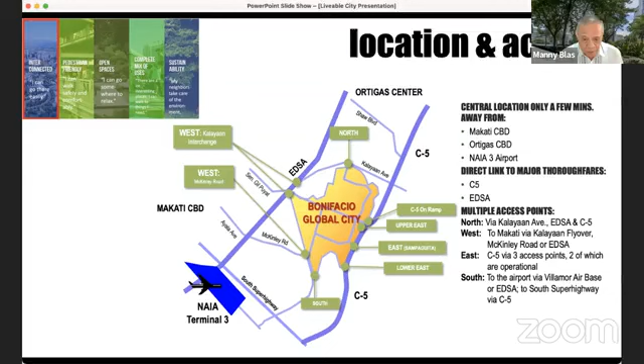This one is more, I think, to what the topic is all about, is how you make it pedestrian friendly.

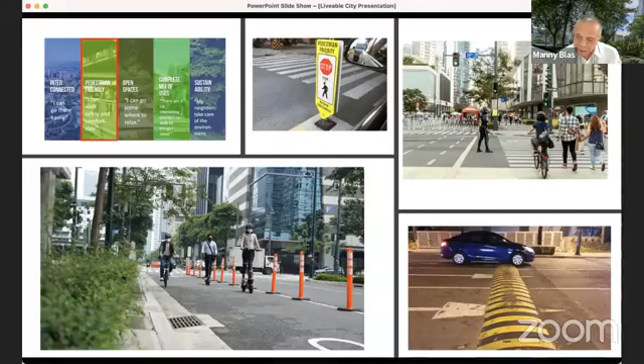The lower right picture shows one of the notorious bumps you'll see in BGC. If you hate this bump and think it's a stupid idea, I plead guilty, because we deliberately made it extra higher than usual, and we did get a lot of complaints. But this bump forces you to stop and really give way to pedestrians crossing. This one is right on the street that crosses to the Mind Museum, so you have a lot of children crossing here. Because of the height of that bump, you have to really stop, pause, and let the pedestrian pass. I bring this up because it was a difficult choice for us, between prioritizing the car or prioritizing pedestrians. We said, okay, let's get the flack, but let's prioritize the pedestrians.

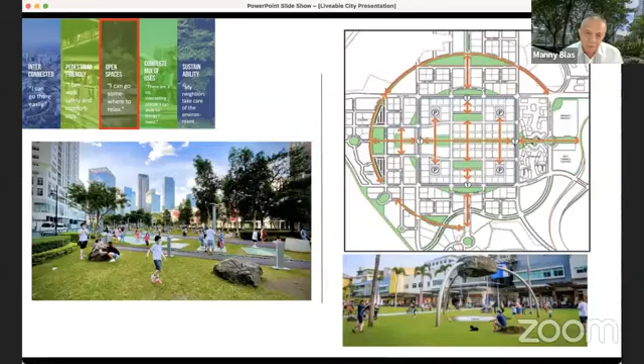Sustainability. There are measures you take to lower your carbon footprint. Even the use of pedestrian lanes and bike lanes lowers the carbon footprint, because it makes it more pleasant for people to walk rather than take a car, say from one part of BGC to Market! Market!.

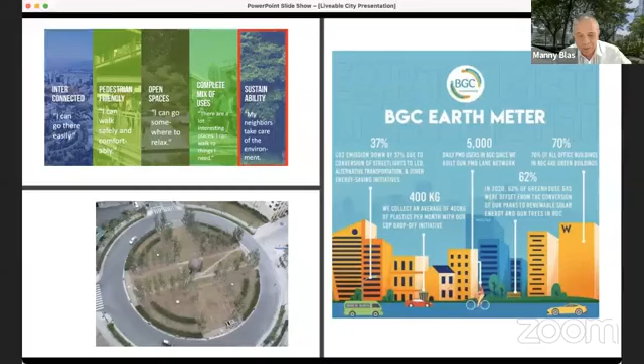I understand there are many mayors watching. This cost us 30 million pesos when it was originally built, and you'd say that's a lot of money. But if you imagine the damages floods cause, it pays back in a very short period of time. During Ondoy, Burgos Circle, the deepest part of BGC, was just about ankle high, while the rest of Manila was being flooded. This really helped us.

Let me now look at a place like Makati, which is fairly built, yet there are things you want to improve on. How do you manage it? This is where we apply the five principles.

In Makati, we wanted to make it pedestrian friendly, but sometime in the 1990s, when vehicular traffic became heavy, we built overpasses around 1995 to 1996. Not many people know there's an overpass connection from Glorietta all the way to Makati Medical Center, about 1.4 kilometers, connected along De La Rosa Street and along the buildings at the back. In some buildings, you can go directly inside from the overpass. It's weather protected, so whether raining or shining, you can go from Glorietta to Makati Medical Center.

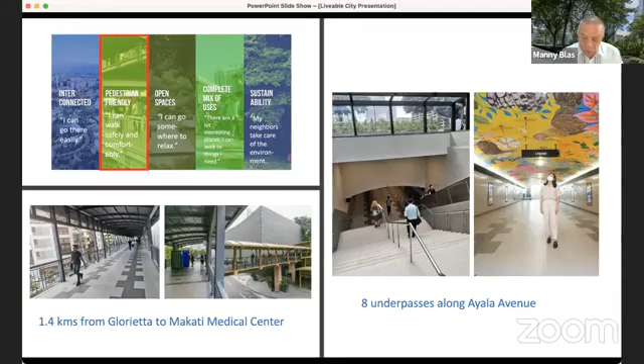Again, because of vehicular traffic, it was fairly complicated for people to cross the street. So we built underpasses so people can cross without interfering with traffic. There are eight underpasses along Ayala Avenue. These adjustments were not in the original plan, but had to be made in the middle of the plan to address issues happening at the time.

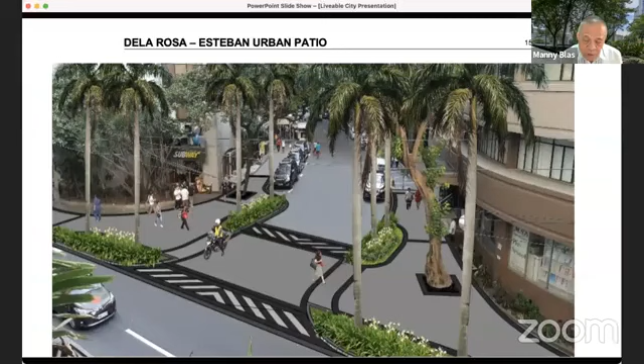Here's another thing I wanted to show briefly. You see how this intersection at De La Rosa and Esteban is fairly wide? What we did was close the intersection gap. I'll show you before and after. You bring the intersection closer together, which makes the pedestrian crossing shorter and gives more sidewalk space where people can gather. We put benches at these intersections to make it a gathering place, a smoking place, or a snack place for pedestrians—again, making it pedestrian friendly.

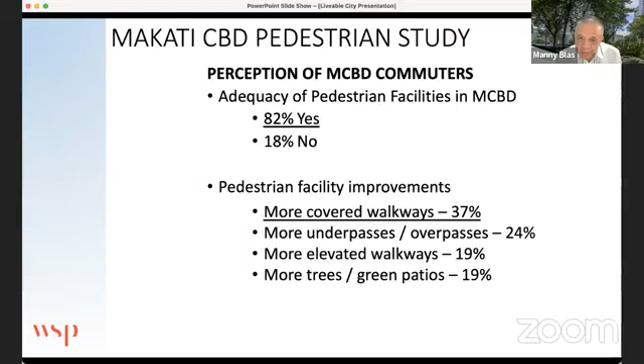We did a study. I've got maybe six more minutes, so let me wrap this up quickly. Covered walkways were our problem—37% said covered walkways. We had enough sidewalks, but not enough covered sidewalks. So we put in sidewalks that wrap around the tree so you don't have to cut it down. These really help pedestrians, especially during rainy season. Notice the arrow pointing to the sidewalk here—these are flat sidewalks, and that matters a lot. You might have a sidewalk that's uneven, but flat sidewalks make the walk very pleasant.

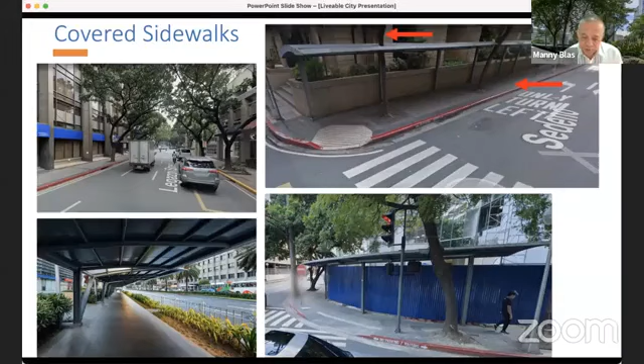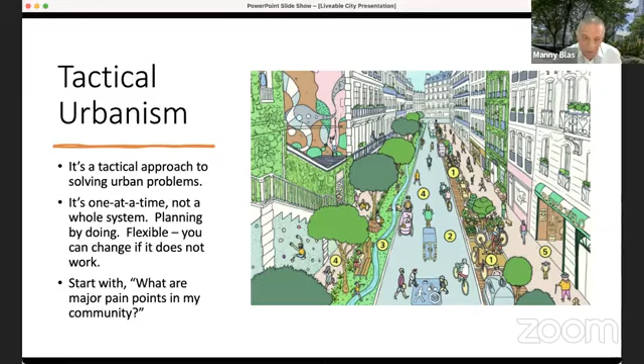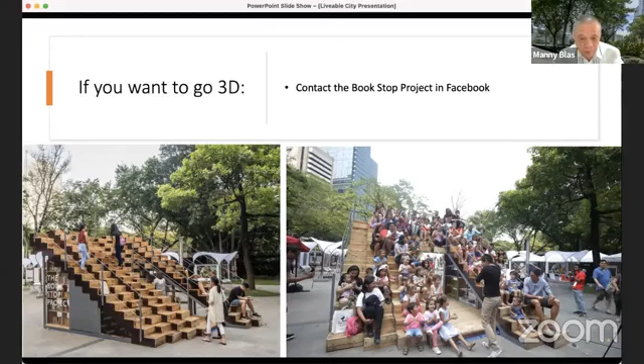If you want to go 3D, check out the Book Stop Project - contact them on Facebook, they install this for free. It's like steps, but underneath are books, and the concept is, if you want to borrow a book, just put another book. It's a perpetual exchange. Here's another look at it - at night it looks even better. Again, ideas that you can pick up.

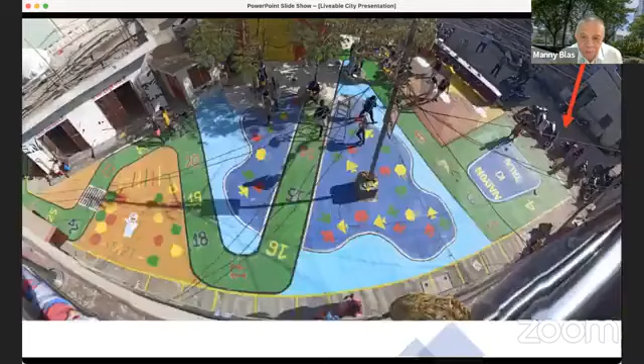Pain point: lack of places to gather. My suggestion is to look at the power of paint. When you look at the street and say, I'm going to paint this and mark it for common use, people respect that paint. Let me show you the next picture. This is a sidewalk where vehicles were probably parking. When they put this paint - can you see this arrow - suddenly the tricycles don't park on the sidewalks anymore. They stay just at the boundaries. This is the power of paint I'm referring to.

Here's another example. This used to be a parking lot. They put bollards on the side, and then they put paint, and now it became like a gathering place.

And I think you can have programs here. You know, if you want some programs or maybe rallies or whatever, you can use it in this space. And people just respect it once you paint it.

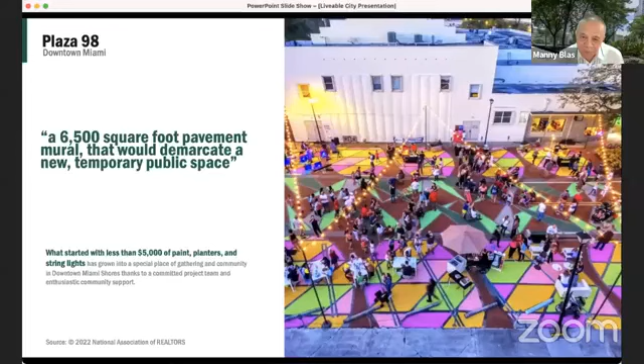Okay, here's another example. You know, kind of overdone, but you put lights, you put paint on the street. It's a way of reclaiming the street. As I said before, we think streets are only for cars, but streets can be for cars and people.

I've given this to some city mayors that I've dealt with, and they appreciate it very much. One is The Triumph of the City by Edward Glaeser, and then the other one is Tactical Urbanism, for those of you who want to learn more about it. Thank you very much, sorry to go over time there.

Thanks, Manny. And thanks for the really good live examples that you presented at BGC in Makati, and also for taking us through a tour of a nice place to live and to work, by the way. And I saw that you even use the corner of where I used to work in Makati. So it's good to see that. Yeah, great examples, really good examples. Thanks, we'll speak more to Manny later.

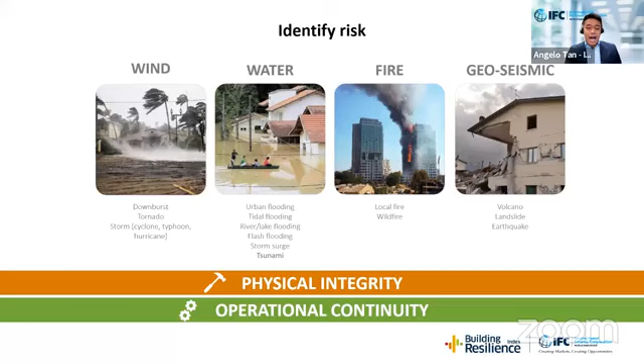We have wind, so that includes downbursts, tornadoes, storms, hurricanes, and typhoons. We're looking at water hazards, various types of flooding, storm surges, and tsunamis. We're looking at fire hazards, which include local fire and wildfire, and also geoseismic hazards, such as volcanic eruptions, landslides, and earthquakes. And we're not only looking at the physical integrity of the building, meaning the way that it was designed and constructed, but also the operational continuity of the buildings as well.

The vision is that each building in the Philippines will be rated from a scale of R to A+. Ultimately, the vision is to get all of the buildings in the Philippines to an A or an even A+ rating. Again, we hope that this can help make more informed decisions about real estate design, construction, and even investment, or even where the ordinary Filipino family will choose to buy their next home.

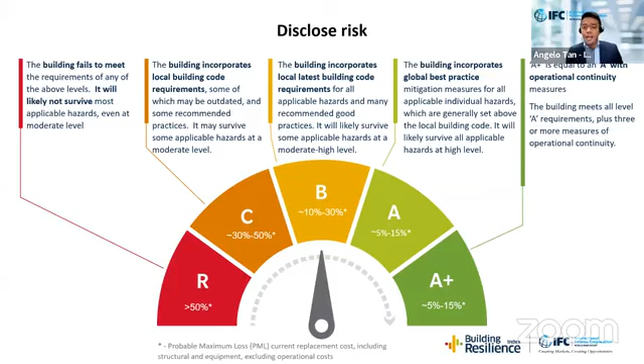We launched the Building Resilience Commitment Campaign in fourth quarter of 2021. It's sort of a resilience pledge where we received a pledge of more than 1.86 million square meters of space to be built or retrofitted to become more resilient to natural hazards.

They're EDGE Advanced certified, and they also have a very high level of resilience through their Conovate technology through Building Resilience Index. So they have certified most of their projects, and for Building Resilience Index, they're doing their assessment right now, and that will be third-party validated as well. Later on, maybe we can go through some of the measures that we implement to reach these levels of sustainability and resilience. So I'm going to stop there.

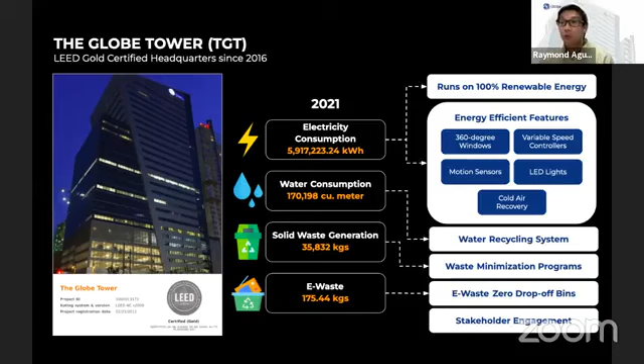We had to look at different ways of making sure we can implement best practices on sustainability. Number one is that at present, the Globe Tower now runs on 100% renewable energy, and I'll discuss how we did that. We have energy efficient features like 360-degree windows, variable speed controllers, motion sensors, LED lights, cold air recovery, however which way we can at least ensure that we are using energy more efficiently and we can minimize waste. We have a water recycling system. We do have waste minimization programs, e-waste, zero drop-off bins. And we do have stakeholder engagement to ensure the sustainability of such practices.

So here, showing the different energy efficient features and how we are running on 100% renewable energy. What we did was leverage the power purchase agreement with renewable energy suppliers since 2019.

So what we did was we leveraged the retail energy power contracts that we partner with in terms of our power supply and included sustainability in the vendor evaluation criteria. This would mean those we partner with to supply our building with power should have at least technical compliance on their power plant portfolio on renewable energy and how they can offer to supply the company, and the capability to issue internationally recognized verified emission reduction certification. This would mean that we will drive and promote that future partners and power plant generators will invest further in making sure they have more renewable energy supply and capacity, and hence scale up or have the capacity for renewable energy in the market grow.

For energy efficiency, we have a number of solutions, which I mentioned earlier. Cold air recovery, the use of cold restroom exhaust air to cool down, and variable speed controllers, and that is how we can have intelligent demand-driven motor controllers to power our cooling. As you know, a lot of the demand for electricity is related to cooling for any large building.

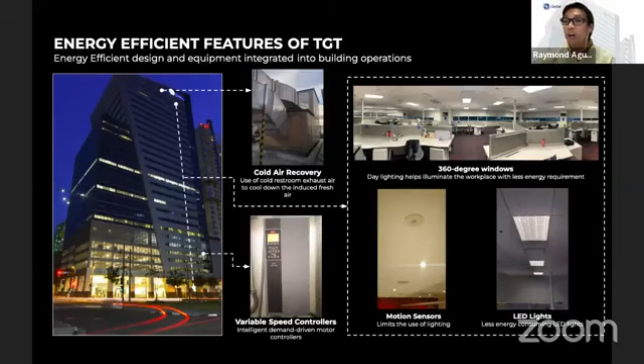We have a 360-degree window design, hence we harness daylight, helping illuminate the workplace. In this photo, you will see that although we do have some lighting fixtures on, there are some lighting fixtures that are shut down because we may not need all lights on for illumination of the open office workplace. We have motion sensors limiting the use of lighting in restrooms. And we have, of course, LED lights throughout the building to make sure that we are consuming less energy in our lighting needs. For rainwater collection and water recycling system, we actually have a gray water system.

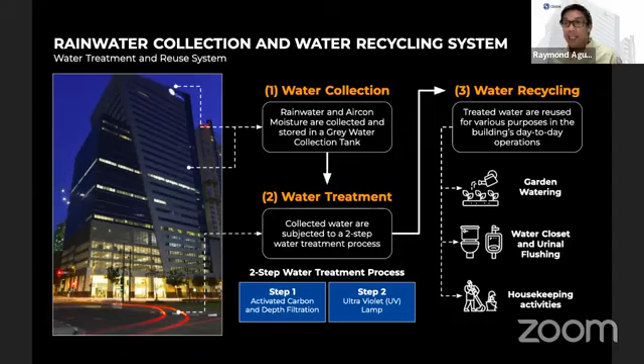It starts off the process with the water collection. Rainwater and aircon moisture are collected and stored in a gray water collection tank. This is treated through a 2-step water treatment process, activated carbon and depth filtration, and then UV lamp. And then we recycle this water, treated water that can be used in various building day-to-day. For example, garden watering, water closet and urinal flushing, housekeeping activities. Hence, we can reduce our demand for commercial water being supplied to our operations.

Apart from the features of the building, we have processes or activities within the operations of our HQ that relate specifically to waste management. We promote responsible waste management, and we have programs to divert waste from the landfill. One of these programs is e-waste recycling, where we deploy e-waste zero collection bins across our office floors to engage employees to be responsible in e-waste disposal and recycling.

Plastic waste management, we actually installed our own plastic shredder for processing of clean and dry plastics. And we have eco-friendly vending machines, cashless vending machines installed across office floors where you can use your own mug or your cup. We don't have to use the standard paper cup for your coffee. It's not a big scale implementation, but having this run in your operations in your building actually engages your employees to be more sustainable even in their day-to-day.

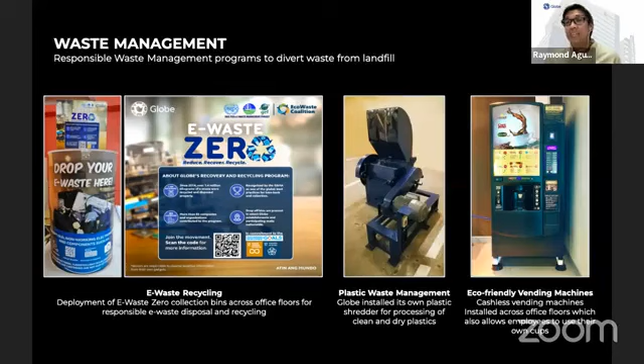For stakeholder management and how we go beyond, when I was first asked to talk about sustainability in operations, the best example would be our building, the Globe Tower in BGC. My first reaction was, but that's an old story, we did that back in 2011, 2012. Then I thought, isn't the mark of a true sustainable practice something you can talk about years after? And I realized almost 10 years after, we are still looking at how we can further improve the practices we have in our operations.

We maintain IMS certified operations: ISO 14001, ISO 45001, ISO 22301, for environment, occupational health and safety, and BCM respectively. In the past couple of years, just last year, we installed the Intelligent Work Environment Monitoring System, a little box you put on a workstation that shows regular and real-time work environment measurement, covering office temperature, humidity, air pressure, dust particles, carbon monoxide, carbon dioxide, lighting, illumination, sound level, and virus index.

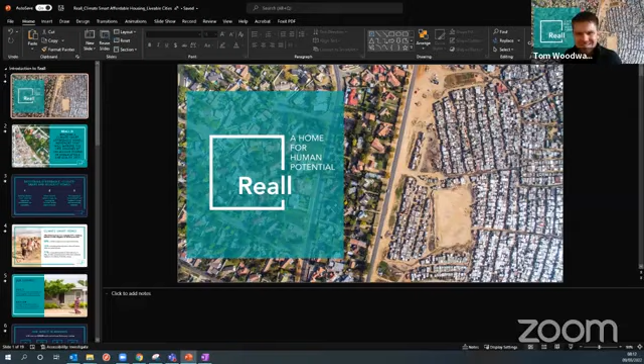Hi Tom, good afternoon. Good afternoon, and thank you very much for having me. So today, can you hear us well? Okay, there you go, we can see your slide now. Okay, go ahead. Brilliant, so thanks very much for having me, everyone, today.

It's been fascinating to hear all of the talks that have happened so far, and we're really looking forward to adding to that. Similarly to Angelo, we'll be talking through some of our building projects and how those relate to transforming a city, both in terms of being climate smart and being resilient.

To very briefly introduce Reall, we're an innovator and investor in affordable housing, and we aim for that housing to be climate smart to improve the life chances of 100 million people in urban Africa and Asia by 2030. We do so by investing in specific projects with our partners around the world, including in the Philippines.

Today I'm going to share with you some of the takeaways and lessons that we've learned from some of those projects. To do so, I have three key messages that I'll explain in detail through some case studies. The first, which I promise Angelo and I did not coordinate beforehand, is that building climate smart does not have to be complicated and it does not have to be expensive.

The second is that when we pursue system change, when we try and transition to a net zero economy, we must not let perfect be the enemy of good. And the third is that the concepts of zero carbon and resilient homes are not mutually exclusive. It's too common for us to see action in one area and perceived inaction in another, but actually we can achieve both with smart and innovative solutions.

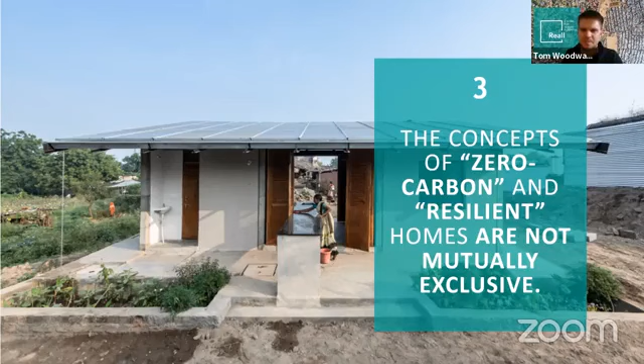This is another of our partners called Billion Bricks, who are currently pursuing projects in the Philippines and India. This is a pilot project in India itself. The model for this housing very innovatively combines solar utility scale and affordable housing, but in the inverse way to normal, where they've started with the solar and then developed the housing. As a result, they have these enormous solar roofs that ultimately reduce the cost of the home by about 20% through the energy savings.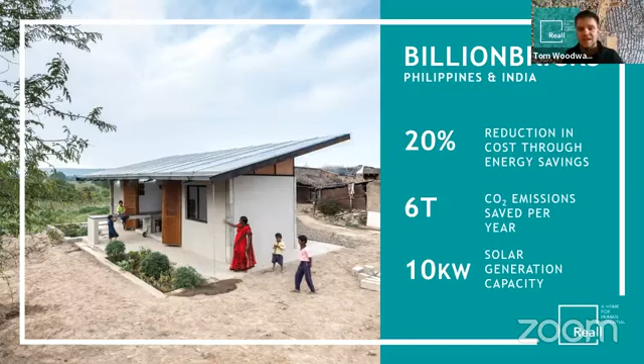They're saving about 6 tons of CO2 a year through that clean energy generated, which is around 10 kilowatts of solar generation capacity. In doing so, they are pioneering a model where for about a 15-hectare site, they're able to generate 10 megawatts of solar generation capacity while simultaneously building 1,000 net zero resilient homes.

The net zero element of this is fairly straightforward to understand through the clean energy, but the resilience, as with the other examples I've shown today, is being strengthened at the same time, because these homes are generating energy near to manufacturing plants and urban centres, providing job provision, reliable clean energy, and integrated water in areas where these sorts of solutions haven't existed before.

Again, this translates to city level, because when you have these kinds of solutions coming through, you start to look at how you develop a city differently, and you start to address some of those challenges, as we've seen with the BGC, where we need to find innovative ways of linking affordable housing in the right locations with solutions to the other challenges that stakeholders and cities face as a whole.

So those are my three key messages today. Building climate smart does not have to be complicated nor expensive. When pursuing system change, we must not let perfect be the enemy of good. And the concepts of zero carbon and resilient homes are not mutually exclusive.

I hope that this has helped inspire some solutions in the Philippines, where we're also active, and would welcome further conversations with anybody who would like to learn more. Thank you.

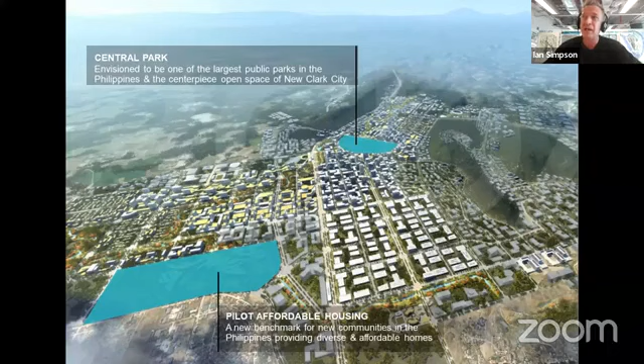I picked up on Manny's comments about the importance of water retention. When you think about a master plan, you have to be very focused on the big picture. I think one of the key mistakes which I've made, and we've all made, is that we look at the red line and what's inside it. Actually, a good sustainable master plan needs to focus on what's outside of the red line—that's more important. Water resilience is really important: does the site flood? What are the benefits in terms of fauna and flora of the scheme?

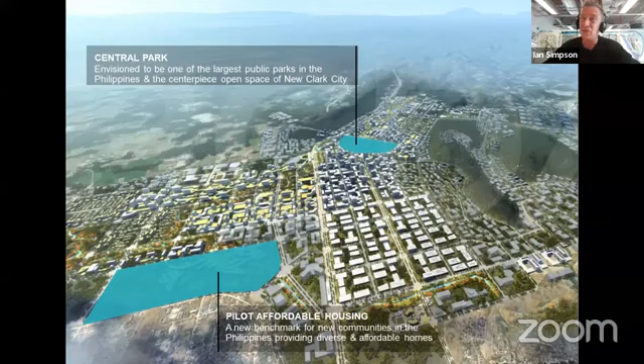It's quite important that this scheme is part of a new master plan. One of the key things we've looked at is how it affects the existing community. It's very easy to focus on the new, but when people live next to and work next to a scheme, you need to consider those people as well.

This shows the site, and you can see some photos of the existing community. The pilot housing is on the edge of New Clark City, so it's more important than ever to think about connectivity—and you shouldn't see that as a negative, because connection adds value. Sometimes people suggest putting a fence around the site, but that's the last thing you want to do. You want to connect and make it safe through good design, which helps both the community you build and the one around it.

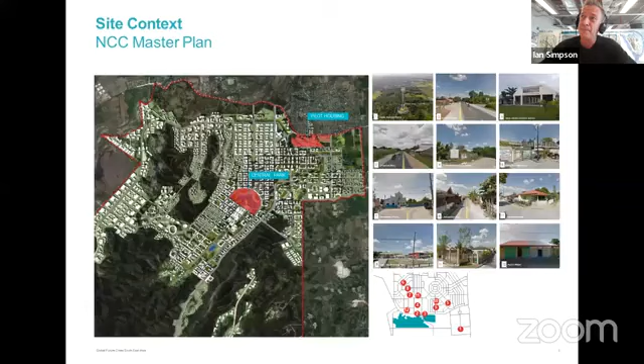I picked up on Manny's comment about mixed use, and this is something you should always consider, even if it isn't the dominant use. What we've got here is a residential site, but what often makes a scheme work and become sustainable is the other stuff. We've got 10% non-residential, which means I don't need to get on a bus—I can walk to a shop, I've got somewhere to work. That 10% really makes the life of the place. We've also worked hard on the spaces between buildings, to make it safe, connected, and to support public buildings that make a community.

Something I've been aware of as a visitor—sometimes you see things from a different perspective—is how strong community is in the Philippines, and how important religion is in life. So within our housing scheme, we wanted community buildings, we wanted a church, we wanted to make sure there are shops and somewhere to go to school. All of these things, in addition to the affordable housing.

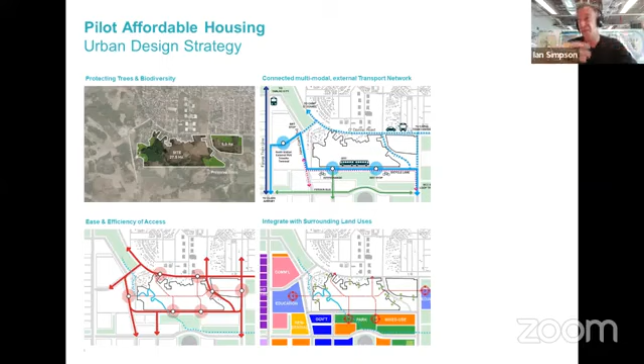Really important: how am I going to get off the bus and walk with my shopping to my house in a safe way? That ease of access, safe access, and what's going to be built around, where are the schools going to be? All of these are key bullet point questions to ask early on.

And I mentioned the park earlier. We're looking at two sites, but they're connected through a green network. This is quite important in the overall master plan of New Clark City - those green connections and strengthening them, because it's part of the thinking about flooding, but it's also about protecting the environment, and about people, how they live.

So we've made that a riverside park in terms of a healthy environment - somewhere to run, exercise, take the kids for a walk, and those sort of activities. You can see some of the diagrams below.

The two circles look at walkability - within this scheme, we looked at the distances which we felt were a good distance to walk. And it started to evolve with two centres rather than one. In most schemes, you say let's put one centre in, but here we felt we didn't want people to get in a car, so it evolved into two centres.

Other slides quickly show that we want to create a mix - not only a mix of use in terms of residential, you need mixes of typologies. One type doesn't fit all, so we've got different types of apartments, different sizes, and also landed houses.

There's often a question in that discussion: landed houses sell, let's cover the ground with landed houses and make them sustainable - but that's not really the case if you're land hungry. One of the challenges of big cities these days is urban sprawl going out further and further. But at the same time, back to that term affordability, I want to make sure I can deliver things that people want to buy as well.

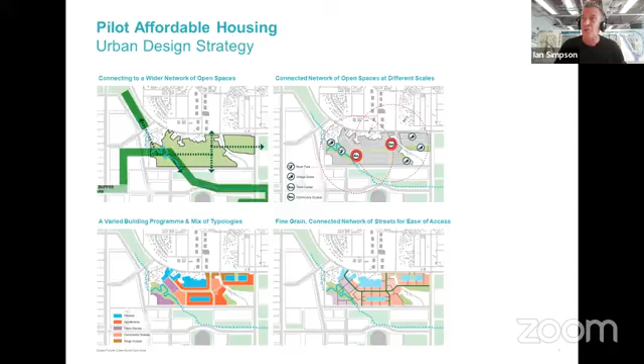So what I'm saying is we create a mix. This is one of our diagrams which looks at types of spaces, clusters of development, so it's feasible. And when a cluster is good, it creates a neighborhood, because 30 hectares is a bit big - you want to have a community within a zone where I know my neighbor. So we split it into clusters.

It becomes deliverable for the potential developers. With this, we're looking at a partnership of private funding to help fund affordable housing at the lowest level and be able to sell. So it's a mix of different typologies within the development.

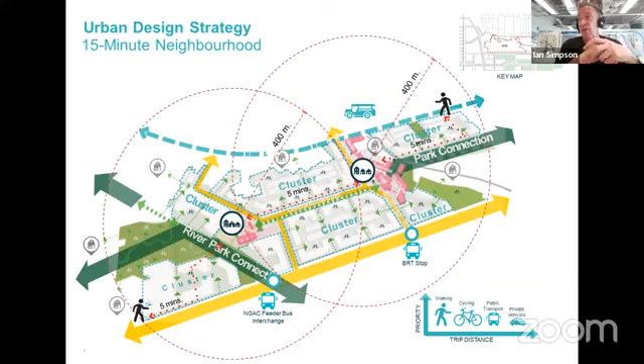And this is where the master plan is at the moment. What we've got on the main roads is slightly larger apartment buildings, and that's down into a hierarchy. When you look at your master plan, usually the bigger intersections have the bigger buildings, and behind there we have smaller housing. Smaller housing also drops down to the local community, so small tying into the existing housing.

You can start to see on this, we've got two key public spaces, one the community square and the other the River Park with the church. So we've really focused on creating a really - I think Manny said earlier - a nice place to live.

And although this is an urban location, we want to have something which is a great place to live, somewhere like my kids want to be brought up, where I want to work, where I want to live - all those things we're aspiring to.

And I love Tom's comment, and I think it was Angela as well, about keeping things simple. So actually, in a good master plan, it doesn't need complex buildings. You keep the actual framework simple - just think about connecting roads, connecting circulation, creating a safe environment.

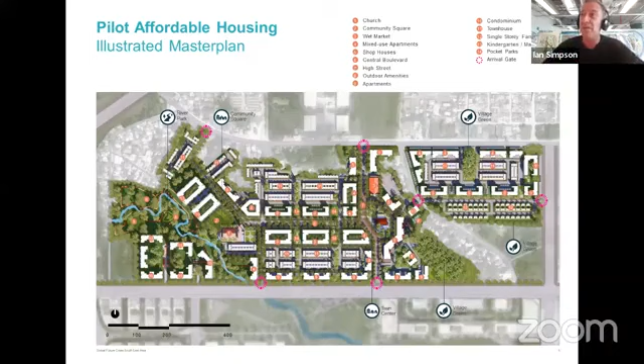And so this is looking at the massing. We have a variety of massing from fairly small scale to bigger scale.

In terms of master planning, one good thing is to make it flexible, allowing changeability as the market can change. With that, we can increase the density, or if demand for apartments increases, we can change the mix. That's one thing we've always tried to do, create a flexible master plan where the framework stays consistent on roads, while having high quality green spaces, those green lungs protecting the environment, creating amenity and adding value to the life of the people who will live there.

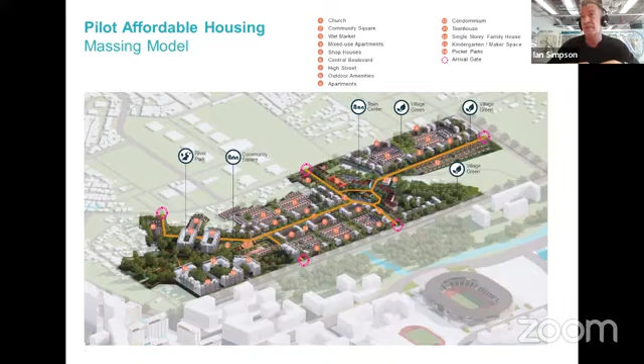We've designed a kind of simple kit of parts, believing in simple product but creating a good community. Eyes on the street, so windows look out, creating simple surveillance. Think about natural ventilation, simple things which put buildings in the right orientation so I can get wind through an apartment building, ventilate cooking and bathrooms, and get daylight on both sides. That's the kit of parts we've developed, and it's efficient, trying to avoid long dark corridors, creating daylight and community at the heart of it.

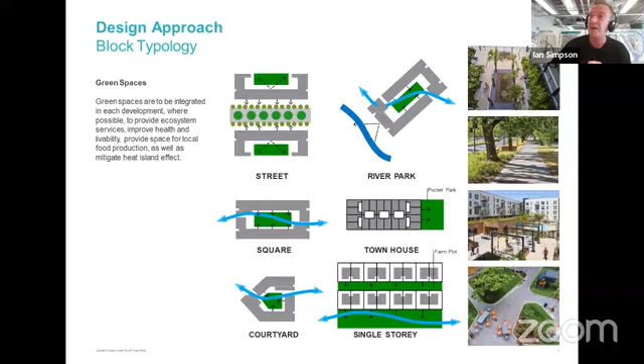It's a hierarchy of spaces. Even a small pocket park can create great amenity for a group of housing. We look at how we can create different typologies of housing, apartments together and apartments on their own, with a hierarchy of space, circulation around the edge, spaces for a small play area, or just to sit under a tree with my neighbor outside my apartment.

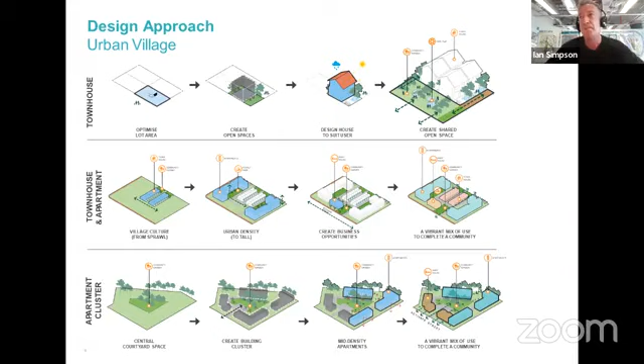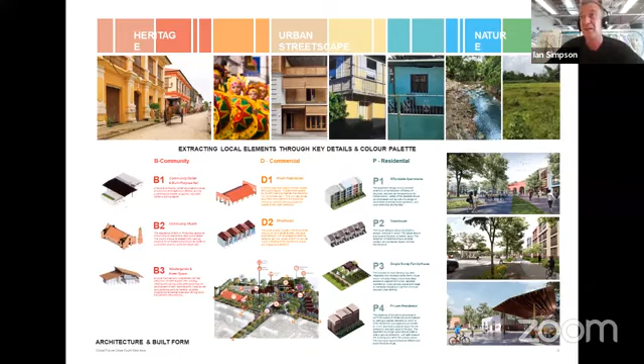This is something we've worked together on, trying to make it contextual to the place. We saw some schemes in Africa earlier; here we try to make it feel contextual to the Philippines, to Clark, without getting too over the top stylistically. We analyzed the heritage, which is not just what a building looks like, but how it's used. That's why we're keen to have a community building, the church, places to meet. We looked at the idea of color, which is very strong in the Philippines, sometimes too much, but we bring that in along with the rhythm and proportion we see locally, generating something that doesn't feel alien to Clark, while keeping the architecture simple because it needs to be affordable. The spaces make the place.

This is working the kit of parts: small core courtyards, naturally ventilated apartments, places which people look onto, while also understanding the module so it can be built cost-effectively. We've also looked at flexibility because everybody's different, thinking about small units used by singles, couples, small families, and growing families, and how that develops as an apartment. People in the residential sector often talk about affordability and efficiency, but I like the word flexibility, because that creates options for somebody to buy and stay rather than have to move.

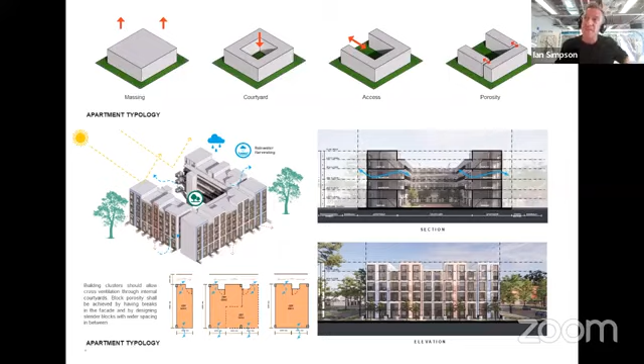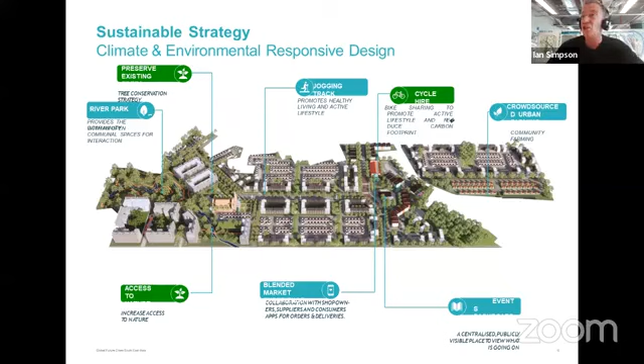This shows some of our sustainable criteria. I'm not going to talk about the detail of individual buildings since this is a master plan, but let's just show some of the images now. I know I'm running over time, so let's click through some of the images.

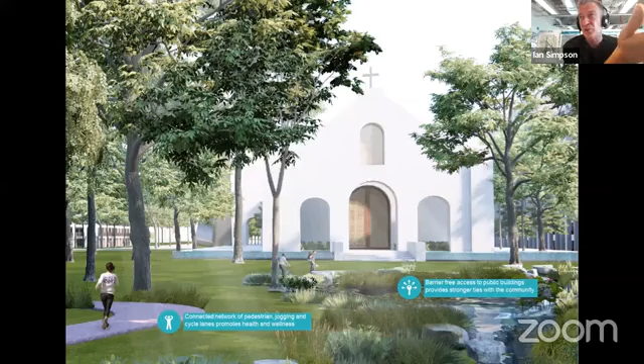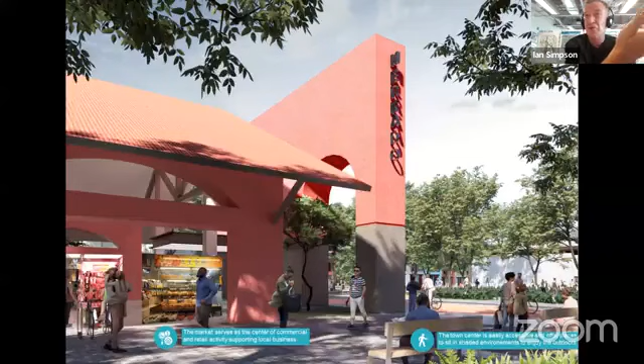Key outdoor space, community buildings at the heart. We've brought in the market, a place to shop, supporting local farmers in the area, so there are businesses where I can buy my food. Somebody talked about the supermarket earlier, but we want not only a supermarket, we want a fresh food market and a community building with simple design, which could potentially be a sales centre, but then long-term become a community building and a sheltered place to meet where events can happen.

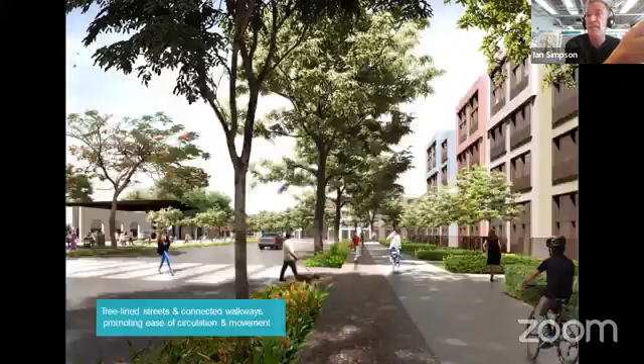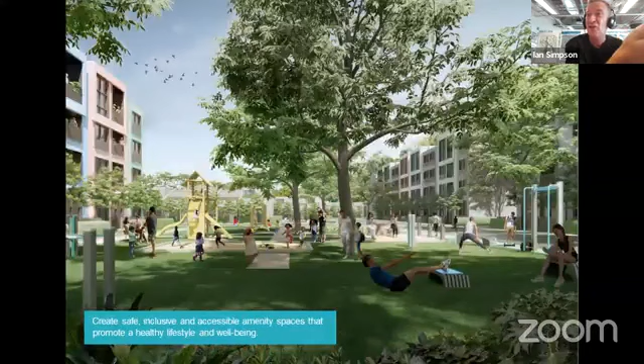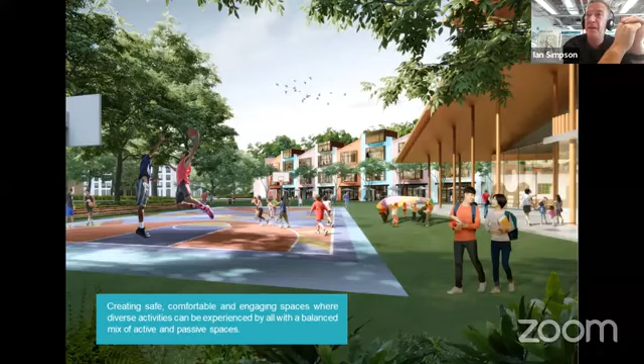Wayfinding, I try to avoid signs. Good wayfinding through landscape really helps create safe, logical, simple straight lines. Outdoor living, good places to exercise, good for families, good places to meet, overlooked rather than pushed to the edge. These are the valuable types of places we want to create. And sports and activities, we've integrated some shop lot units, different types of units to create a really rich environment.

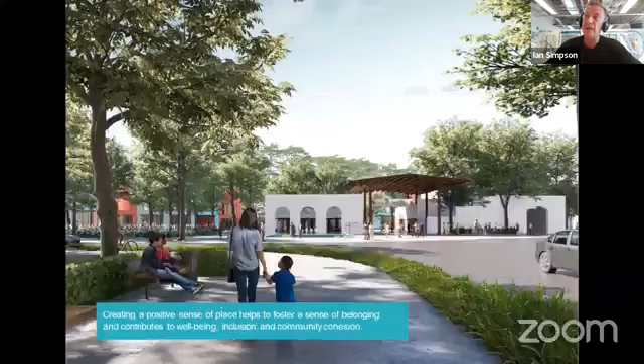And keep going, this is the central square. I won't talk through Central Park in detail, maybe another time, because we're pushing for time. One key thing about a master plan is you need to think about the big picture. These two sites are connected through rivers, and one thing mentioned earlier is water management. For our Central Park, it acts as a way to contain water in flood conditions, so we've designed a park with a huge amount of water capacity for New Clark City.

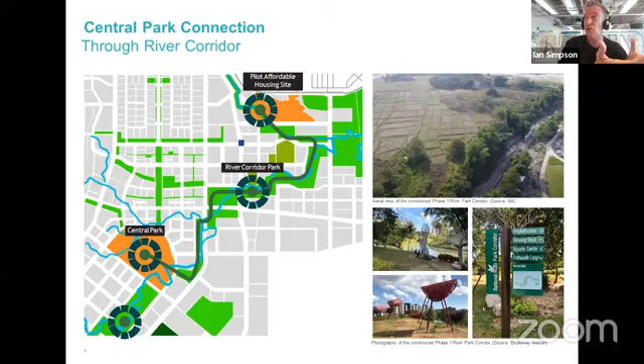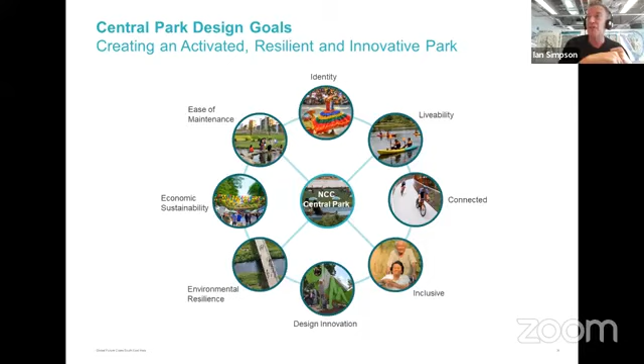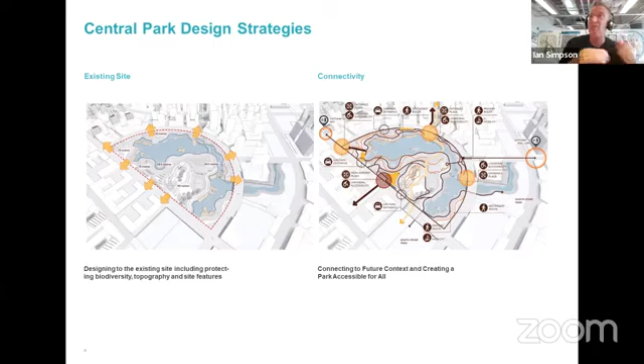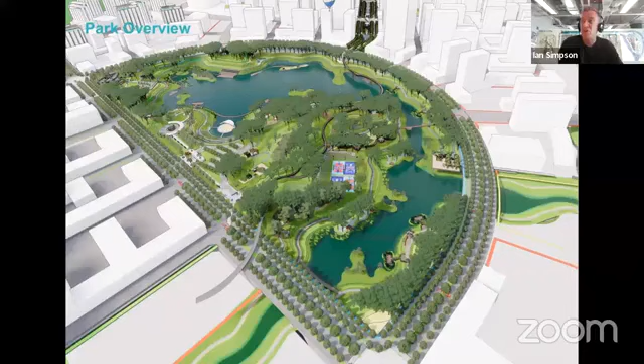If we click through again, since we're pushing for time, I can show the key drivers. When you design a master plan, think about what you want it to do, so you can judge it rather than just wanting a nice place. What do we need to do to make this work well as a scheme? Picking up on earlier presentations about activity, uses, and outdoor space, we're pushing this park hard so it works in many different ways, at different times of year. Clicking through the slides, it adds value in terms of sustainability and water retention, preventing flooding for the community, while being a real heart of the community.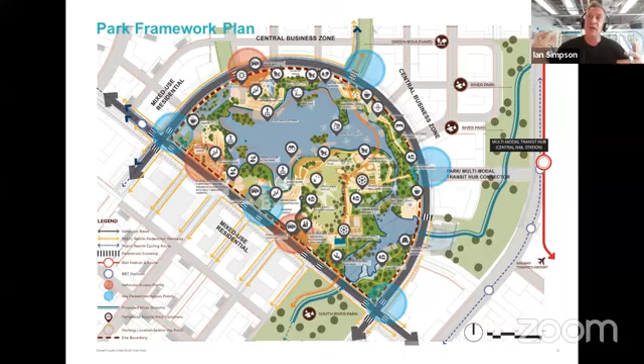This will be one of the biggest parks in the Philippines. We don't just want a bit of green, we want it full of activity. I mentioned shaded spaces earlier, and we want to use this park in different ways, for different people, for different types of day. It's going to have everything in there, and it's really going to become a sustainable park, but really a good, sustainable community park as well.

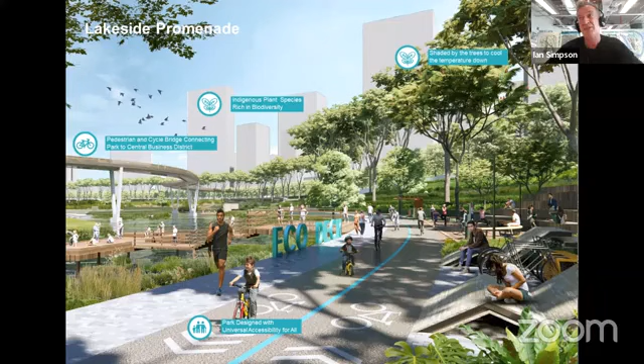One of the benefits, talking about cost earlier, is that parks really uplift cost and value to a community around them. So if you've got a residential or office building, it will add value. This is proved all over the world. Providing high quality spaces for people to gather and exercise actually pays for itself, because offices and apartments see a significant uptake from being next to spaces like this.

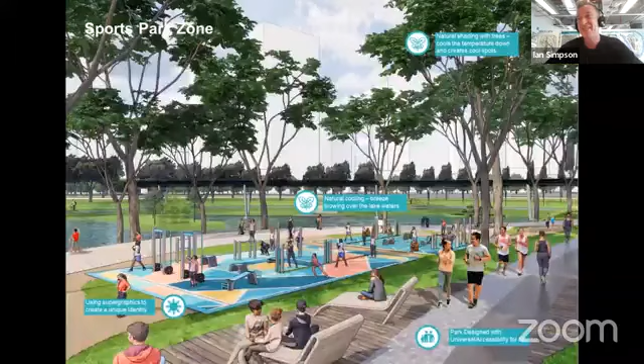I'm just going to click through the slides. I think I've overrun my time, but we've got two very interesting schemes being developed in New Clark City. I'm really happy to take any questions on that. Thank you so much today.

Thank you, Ian, no problem. Thanks for the presentation. I'm a locator in Clark, so I look forward to seeing the completion. I must tell you, I've been to parts of that area, not the Central Park, but the river portion, and of course near the athletic stadiums and swimming pool sites. It's a beautiful area, we look forward to it. I like how you think of a lot of things, including small farm lots, which not too many people actually think about. We're looking forward to it and watching closely, because this is a golden opportunity, one of the rare opportunities, maybe the only one in the Philippines now after BGC, where you get to build from scratch. This is going to be really great, and we'll love to see progress over time. So thanks for that, Ian.

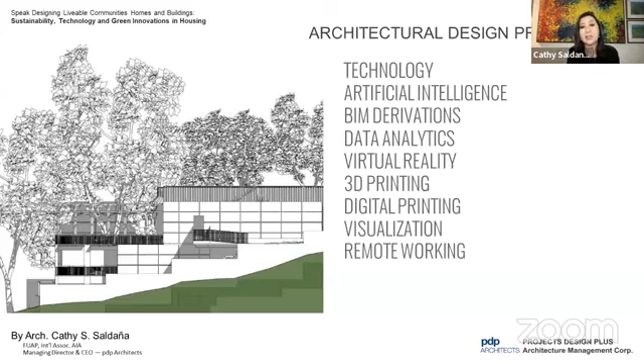We look at our practice and understand that we mix AI with BIM derivations, which is building information modeling. We study data analytics now for every barangay, for every small community, and put forth ways by which they could expand and how developers could come into the picture into an otherwise tertiary town and find out, using virtual reality, how developers could also visualize the existence of their profitable real estate development in an area where there are mangroves or small fishing and coastal communities in an area where you still need to protect forests. And all of that, all put together in how we now plan using various technological means.

And then we look forward now to how the rest of the years will come for the Philippines. It's very exciting that we are approaching the new Clark City and finding that there are so many interesting government projects that will come forth out of this, and there will be more townships to come. And there are now new urban centers.

And in doing so and seeing all of that, we just have to be so mindful that, say you are doing a new township in Bulacan or in Ilocos or parts of Taal, Batangas, you have to preserve. And yet, when you are working in Coron in Palawan or somewhere else in Bohol, you need to be mindful of the coastal development.

So create new centers for people, for work, for play, and for living, and be able to understand how connectivity will also take place, because now connectivity is a need that is a post-COVID standard. From now on, everybody will demand to be online in all the communities and niches that we are all creating, and wherever we are finding that health centers and facilities are so important.

There used to be this whole concept of that massive medical center. Now we need to create them in much the same way that you are creating retail into pocket cities, so that everybody has access to retail, education, medical care, all the basic needs.

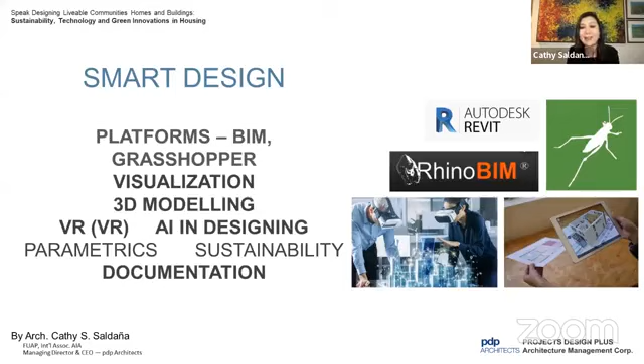Our technology now is all about risk mitigation, not just in the design process, but in the end output, which would be the buildings and houses that we put together. And on the next slide, we are looking at various green innovations.

So when we do these green innovations, we are seeing that most importantly, we have BERDE here, but yes, I have been converted to be such a big fan of Edge. And so we are looking at several developments of ours now with our clients that will shift to Edge as well. But thank you to all the LEED and BREEAM who put it all into place, because now we're able to tailor fit our needs here in the Philippines towards what is good. As a BERDE certified professional and associates of ours who are Edge certified, we are finding that these two, even together with WELL, fit so closely to what we need here in the country.

And the green building framework is so important, from management to use of land and ecology, to energy efficiency and conservation, to water efficiency and conservation, waste management, and the use of green materials, and how they are put together, documented, applied, and constructed.

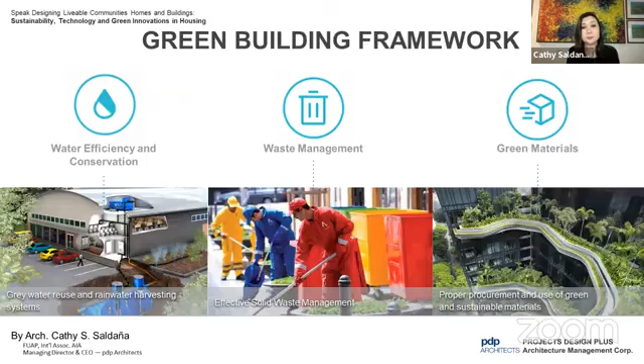We look as well at transportation and the strategies by which people can get to work, to play, to education, understanding the value of indoor environmental quality and emissions, and looking forward at some of the electives that help make that building, that development, or that community an excellent model within society.

Looking at employment and economic opportunities, equality, education, and skills development, our communities must provide community engagement and benefit, not just to earn points, but truly to be focusing more on people towards health and safety. This is our goal for the future in everything that we do. We are so cognizant of the people we work with, most especially our mayors and all the leaders in the various communities. It's all about people, health and wellness, that work-life balance, the future that we are creating for our children, as well as the efficiency and effectivity of our buildings and communities towards creating a better future.